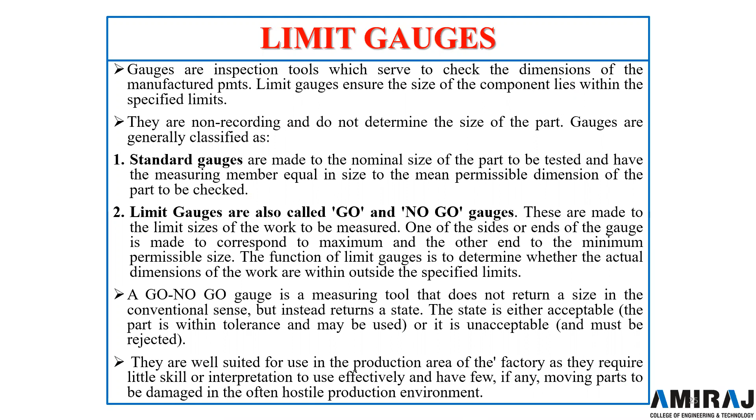In previous lecture, I started the topic limit gauges. Now let us recall about it. So in limit gauges, there were go type of gauges and no go type of gauges. The necessity and the principle of gauging, Taylor's principle. Then the types: the plug, ring, snap gauges, major gauges.

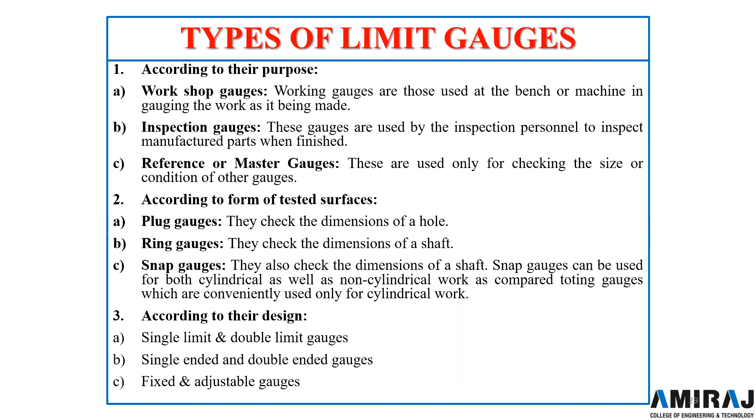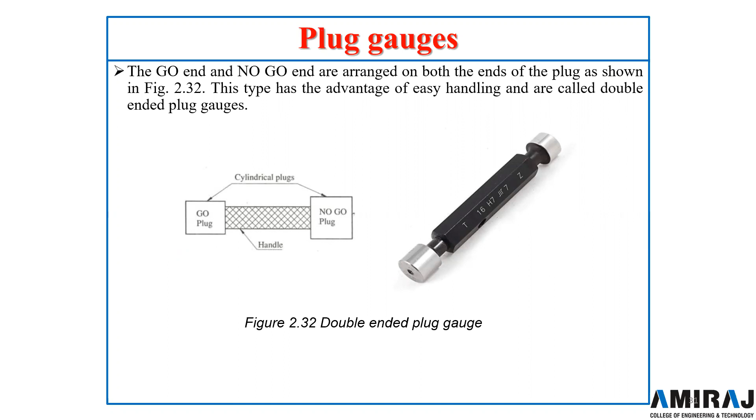Then I explained about the plug gauge, progressive type, and this one is the plug go and no go gauge on both ends of the gauge. This was the tapered or the conical section go and no go gauge. This was about the ring gauge, and remember one thing, in no go gauge there is a small groove cut in the periphery to identify it.

Now we will move on to the other remaining gauges. First one is the snap gauges. Snap gauges are used for checking external dimensions. As you can see in the figure, with the snap gauges we can check the external dimension. They are also called gap gauges. They are specifically designed to measure or check the gap between the component.

A snap gauge usually consists of a plate or frame with a parallel faced gap of required dimension. Snap gauges can be used for both cylindrical as well as non-cylindrical work as compared to ring gauges, which are conveniently used only for cylindrical work. As you can see in the figure, it is possible to accommodate cylindrical as well as non-cylindrical components in the snap gauges, while in the ring gauges only cylindrical components can be checked.

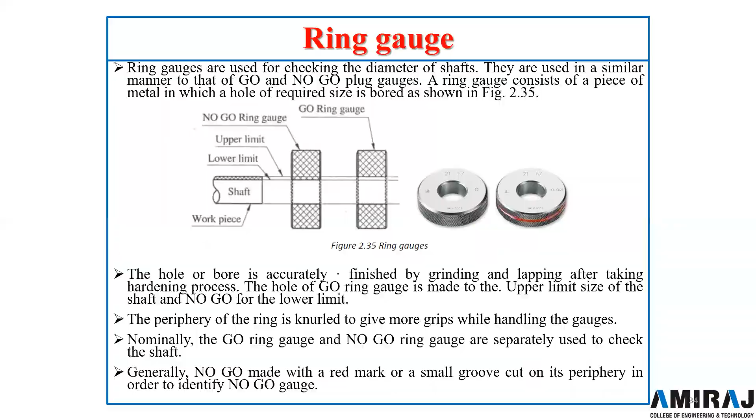A double-ended snap gauge, as shown in figure, is having two ends in form of anvil. The go anvil is made to lower limit and no go anvil is made to the upper limit of shaft as usual.

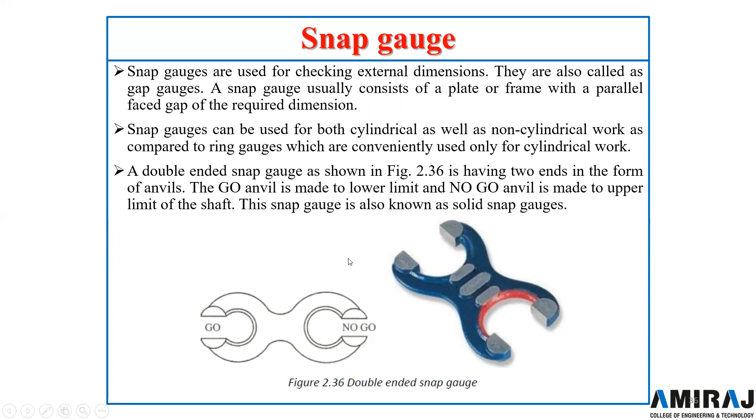When both go and no go anvils are formed at the same end, as you can see in the figure, it is called a progressive snap gauge. Similar to the plug gauge progressive type, there is also a progressive snap gauge. It is mainly used for checking large diameters up to 100 mm.

Go anvil should be at the front and no go anvil at the rear. As usual, you can see from the previous part of plug gauge, the go gauge was before the no go gauge. First comes the go and then the no go gauge. So diameter of shaft is checked progressively by these two ends.

This type of gauge is made of a horseshoe shaped frame with I section to reduce the weight of the snap gauge. It looks like a horseshoe, but it has an I section to reduce the weight. If you take the section, it will be I, but it is designed as a horseshoe shape.

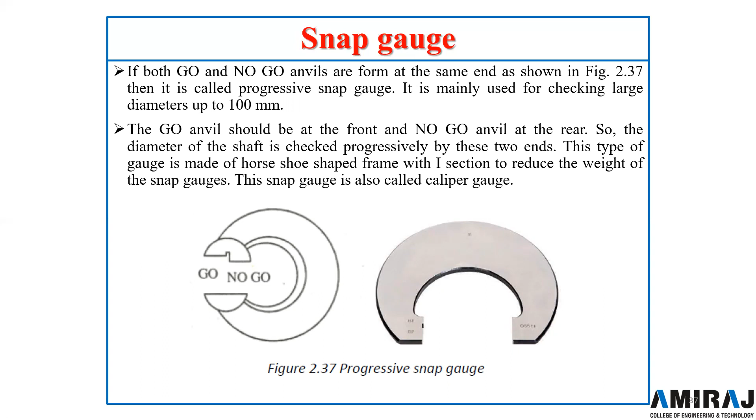Now an adjustable snap gauge, as shown in the figure, consists of one fixed anvil, this part over here, and two small adjustable anvils. The distance between the two anvils is adjusted by adjusting the adjustable anvils by means of set screws. For go and no go gauge, separate screws are provided, and we can set these anvils to a particular position.

These adjustments can be made with help of slip gauges for specified limit of size. Slip gauges will be required to adjust the anvil for a particular size if you want to make a go and no go gauge. You put the slip gauge and adjust the anvil. They are specifically used for checking large size shafts.

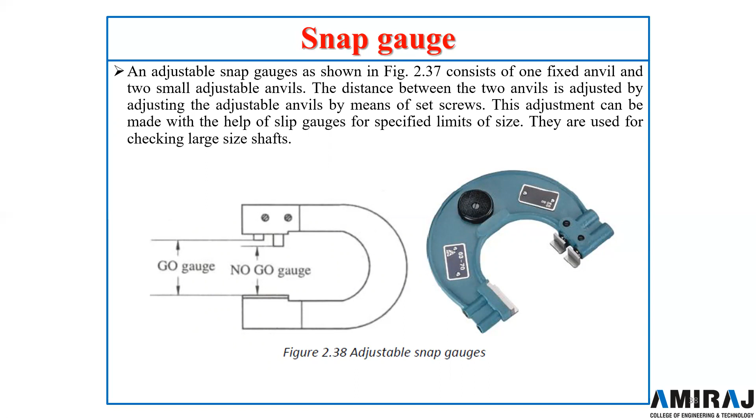Now we will move on to the next topic, that is the comparator. Today we will discuss the need of comparators. While explaining the dial indicator and other components, I explained that in mass production, identical component parts are produced on very large scale. To achieve interchangeability, these parts should be produced to close dimensional tolerances.

As a result, inspection is often more concerned with the dimensional variation from the standard or basic dimension of the part. To this extent, inspection becomes a process of comparing the manufactured part to the master part envisaged by the designer. The use of vernier or micrometer will not be feasible because of the skill and time required to measure the dimension. Use of comparators requires little or no skill from the operator, eliminates the human element in taking measurements, and gives quick, highly consistent results.

Apart from the plug gauge, ring gauge, and snap gauges, there are comparators which are used for quickly measuring the dimension of the part and eliminate the use of vernier and micrometer. As you know, the vernier and micrometer require skill and also require time.

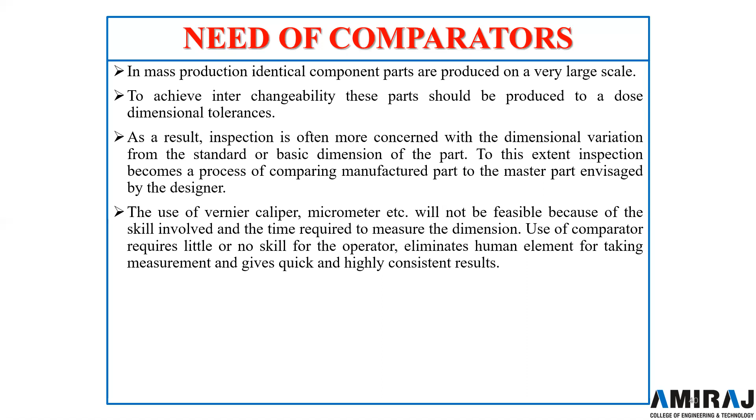So where are comparators required? They are required mainly where the production is very large and we want the tolerance to be achieved and the part to be interchangeable. It needs to be checked perfectly.

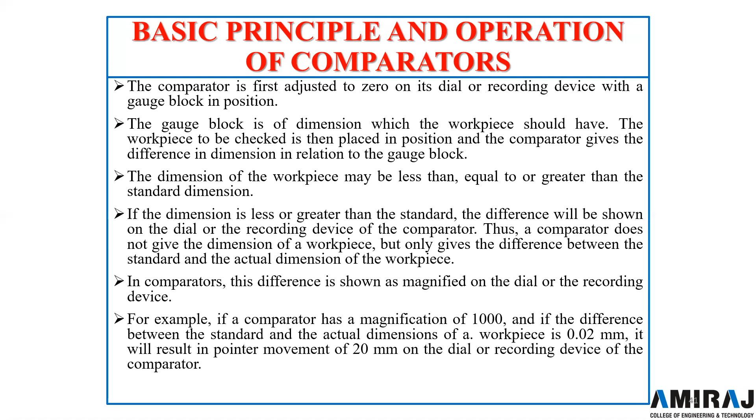For example, if a comparator has a magnification of 1000, and the difference between the standard and actual dimension of the workpiece is 0.02 mm, it will result in a pointer movement of 20 mm on the dial or recording device of the comparator. The magnification is 1000 and the difference is 0.02, so 0.02 multiplied by 1000 gives 20 mm movement on the dial. So we can easily identify differences of microns with the help of a comparator.